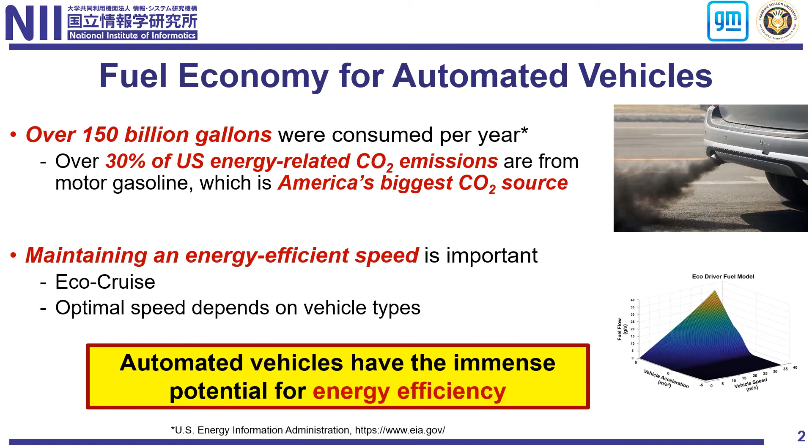In fact, motor companies have a vehicle fuel table for each vehicle type, which is presented in the right figure. By using the given speed and acceleration, we can know the expected fuel consumption per time unit. To sum up, connected and automated vehicles have huge potential for saving energy.

So let's see the lane-changing maneuvers for human drivers. When we look at human drivers' behavior on highways or motorways, they adaptively and dynamically change lanes in order to save travel time or fuel consumption. Lane-changing maneuvers can be classified into two types, mandatory lane changing and discretionary lane changing. Mandatory lane changing is for navigation purposes, and discretionary lane changing is for secondary purposes, such as travel time or fuel consumption.

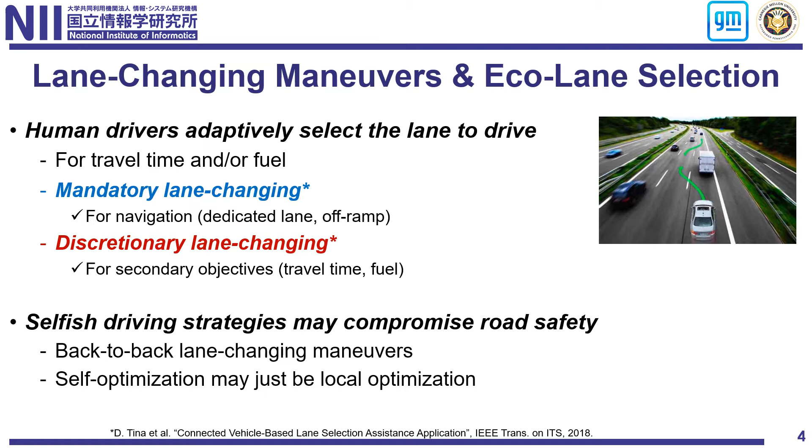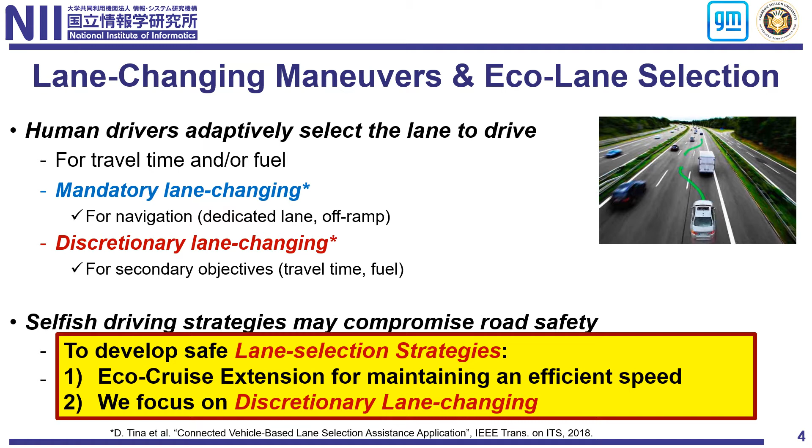In addition, for lane-changing maneuvers, selfish driving can compromise road safety. For example, aggressive back-to-back lane-changing maneuvers may improve travel times or energy consumption, but this selfish driving might have a negative impact on the entire traffic. Overall, to develop safe and practical lane changing and lane selection strategies, the eco-cruise function has to be considered, and we have to focus on discretionary lane changing maneuvers.

So here are the requirements and design policy for our eco-lane selection strategies. First, road safety is the primary concern, and we never compromise safety. The target lane should have sufficient space to complete the maneuver. Also, the protocol has to avoid aggressive back-to-back lane changing maneuvers. Next, since we focus on energy consumption, we do not consider navigation and mandatory lane changing maneuvers.

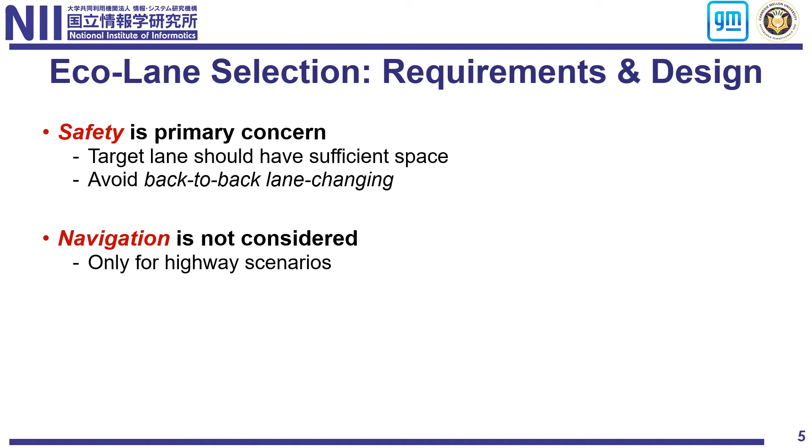Therefore, we extend the eco-cruise component for eco-lane selection, which is named MultiCruise. In MultiCruise, each vehicle has multiple cruise targets, which drive on the current lane, right lane, and left lane. We simply select the appropriate target vehicle to cruise for eco-driving. To design appropriate eco-lane selection strategies, our protocol uses a cost for energy and a penalty for safety. We present the cost function and penalty function next.

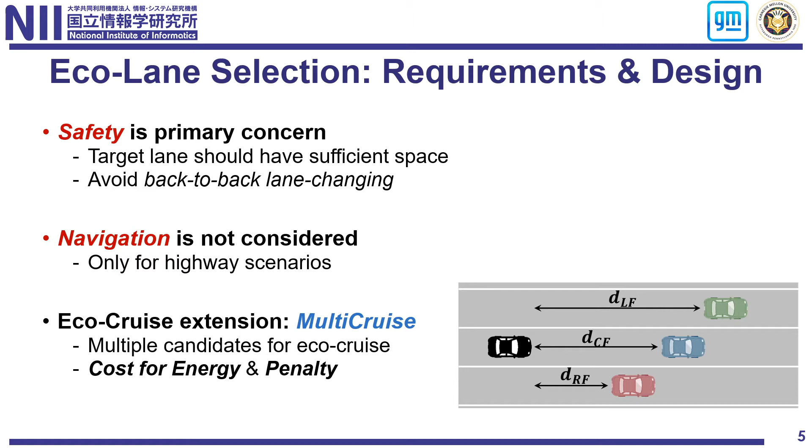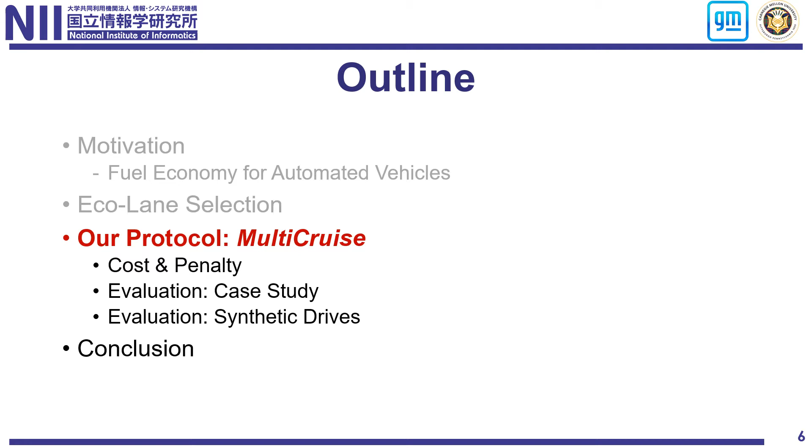So here is the outline again. We covered the eco-lane selection strategies and the overview, and we will present our protocol, which is named MultiCruise.

So let me explain the cost function and penalty for MultiCruise. First, in MultiCruise, each vehicle calculates the energy cost for the right lane, current lane, and left lane by using the target vehicle's information and inter-vehicle distances from onboard sensors and V2X communications.

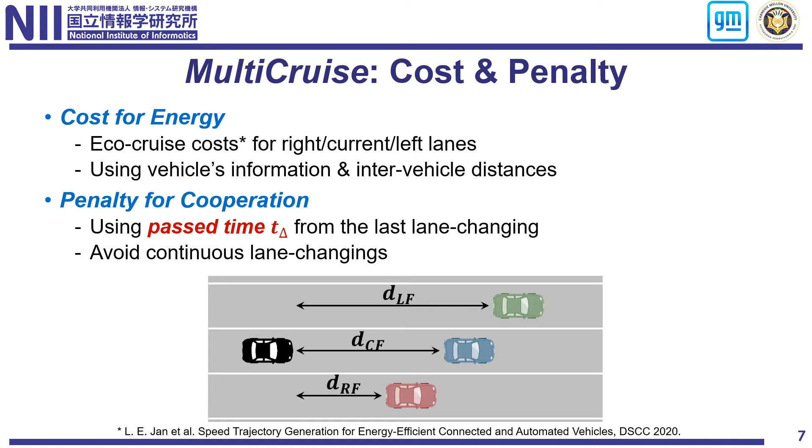In addition, to improve road safety, the protocol uses the passed time T delta since the last lane changing maneuver. By considering the passed time T delta, the protocol can avoid aggressive continuous lane changes. To wrap up, by using the energy cost and penalty functions, each automated vehicle completes lane changing maneuvers in a cooperative and energy efficient manner.

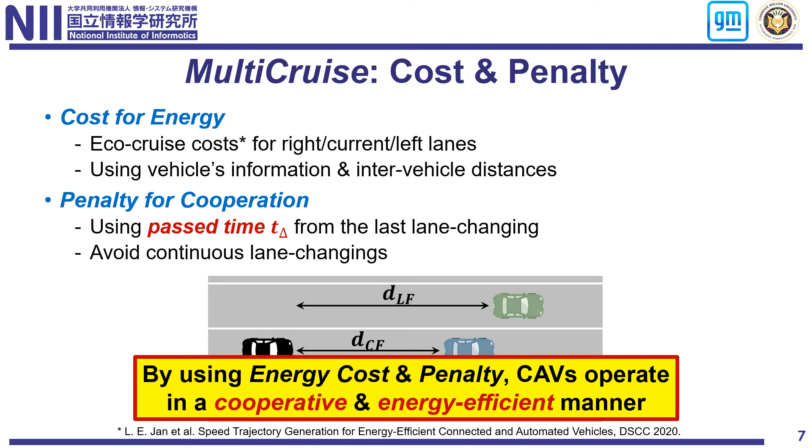Let us see the actual implementation of the MultiCruise protocol. First, to guarantee road safety during the lane changing maneuver, we implement the space checker, which is for confirming the road safety on public roads for the target lane. When the target lane has insufficient space for lane changing maneuvers, the lane changing maneuver has to be cancelled.

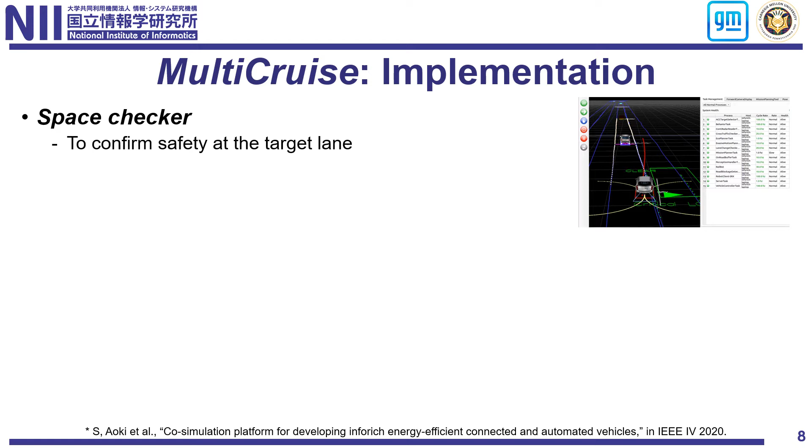In addition, since the test and verification for the lane changing maneuvers on public roads might be difficult, we use the info-rich co-simulation platform, which was presented at the IEEE Intelligent Vehicles Conference in 2020. The co-simulation platform includes 3 software: Traffic Environment Simulator, Eco-autonomous driving software, and Simulink-based vehicle simulator. We implement the MultiCruise component on the Behavior Planner for the Eco-autonomous driving software.

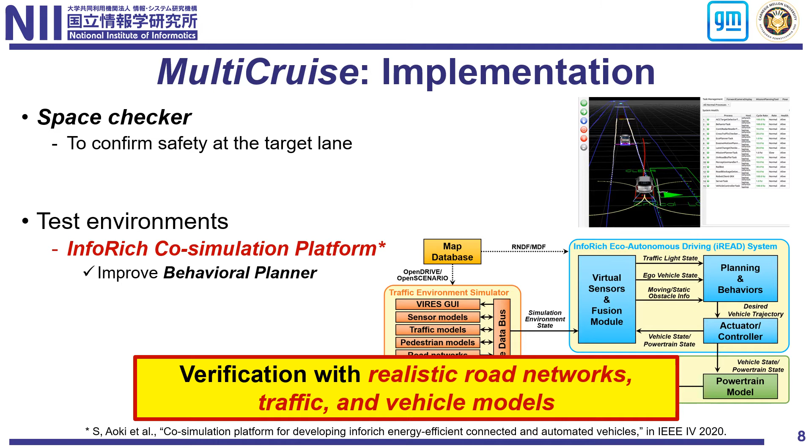Therefore, by using such Eco-autonomous driving software and co-simulation platform, we can test and verify our protocol with realistic road networks, traffic models, and vehicle models. Here is a demo video for our MultiCruise.

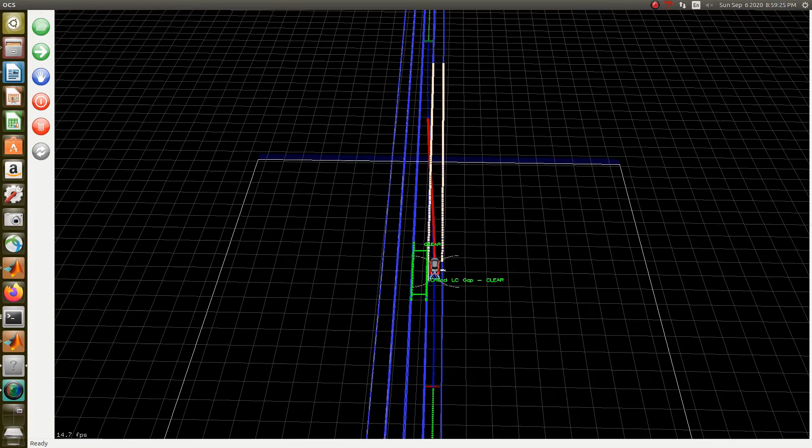When the vehicle finds a slow lead vehicle on the same lane, the vehicle starts to search the target lane to drive in. After confirming the safety by using the space checker function, the vehicle starts to change the lane and passes the slow vehicle. After the passing maneuver, the vehicle goes back to the original lane by using the space checker.

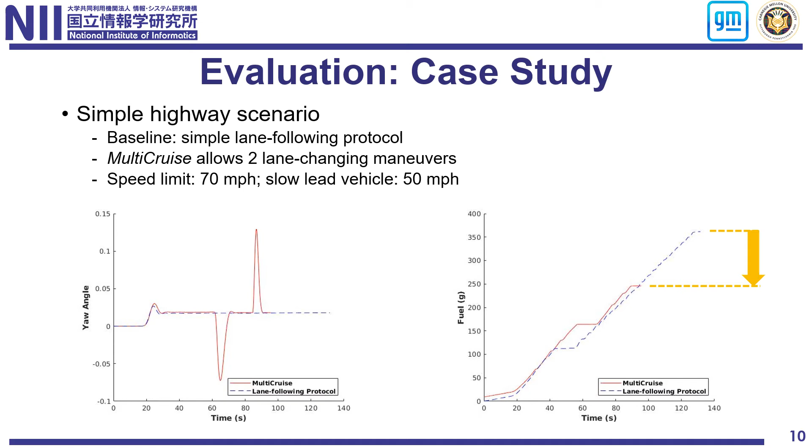Also, in the right side figure, we show the consumed fuel on the y-axis and the passed time on the x-axis. Compared to the simple baseline protocol, our protocol could save fuel by over 30% because of the short travel time and appropriate vehicle speed and control.

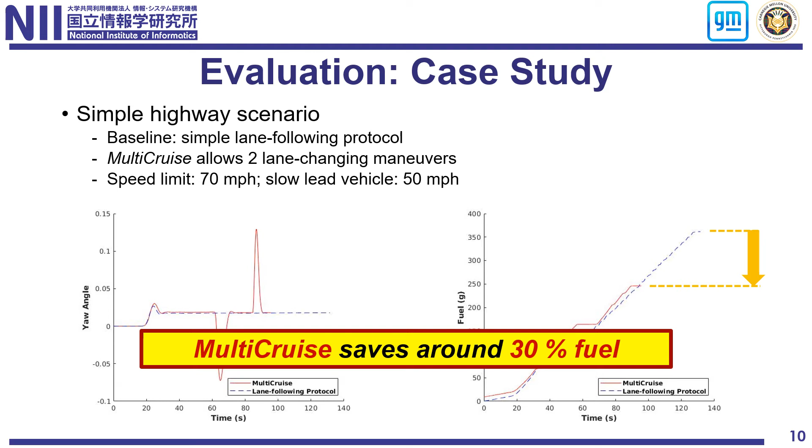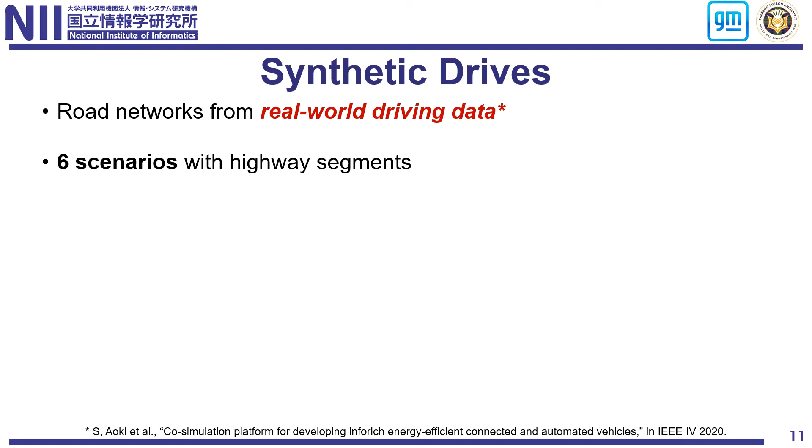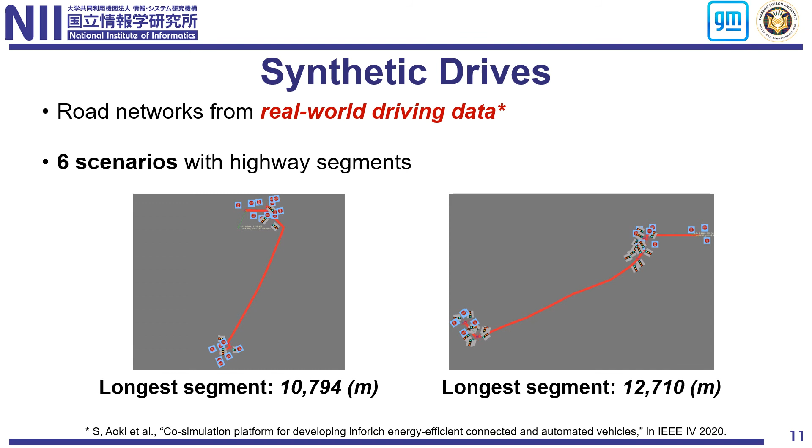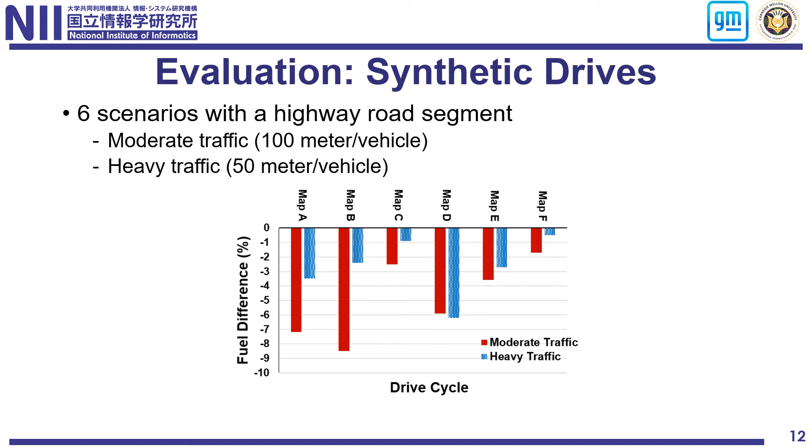For example, in map A, under the moderate traffic, the vehicle can save around 7% fuel. Also, in map A, under the heavy traffic, the vehicle can save around 4% fuel by using our MultiCruise component. To wrap up the evaluation result, MultiCruise saves fuel consumption in all cases we considered in the evaluation.

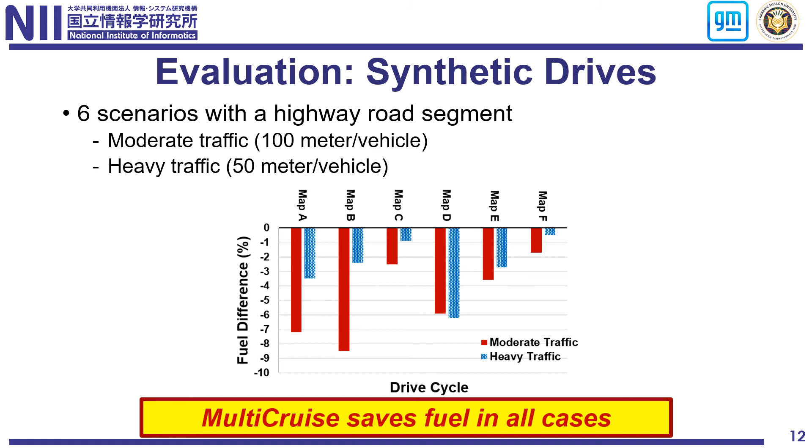Let me wrap up the presentation and discussion. First, we present our eco-lane selection strategy, named MultiCruise, in which the automated vehicle keeps calculating the cruise cost for multiple target vehicles. Also, we consider the cooperative and safing mechanisms to avoid aggressive back-to-back lane changing maneuvers.

Lastly, to show the feasibility of our protocol, we use the info-rich co-simulation platform and realistic road network models, and we show the evaluation results in which the vehicle saves fuel consumption on highway road segments.